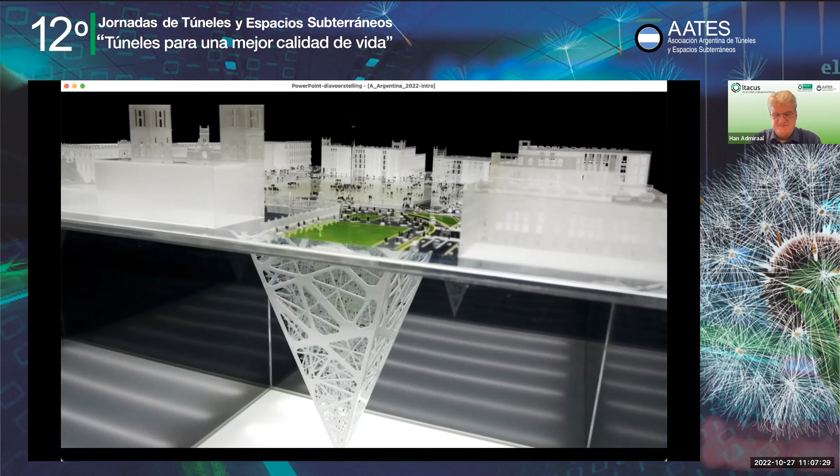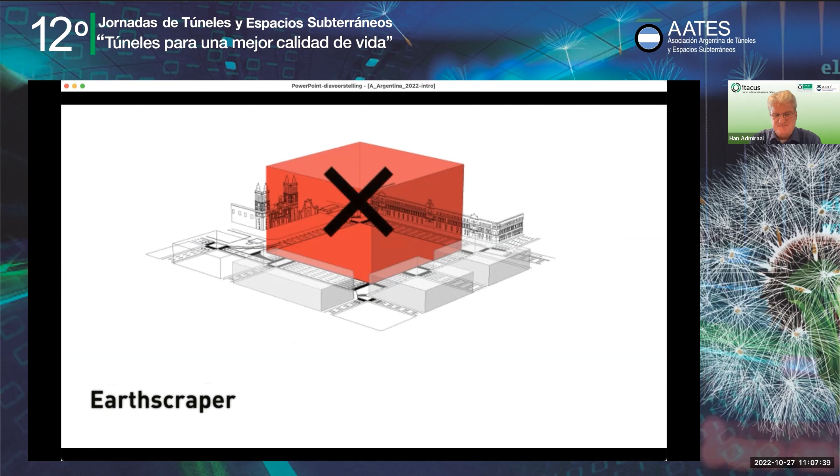Imagine a city with a historic centre, a city with planning legislation prohibiting the demolition of heritage buildings, a city with height regulations limiting new buildings to 8 floors. Imagine that historic city centre needing new social and transport infrastructure, living and office space, leisure facilities. Where would you find the space to fit all this in? You'd find it here, in the Earthscraper, a 65-floor deep, inverted skyscraper. This is all the space you need with no compromise on the existing urban fabric. The Earthscraper is an inverted pyramid with a central void, allowing all underground habitable space to enjoy natural light and ventilation.

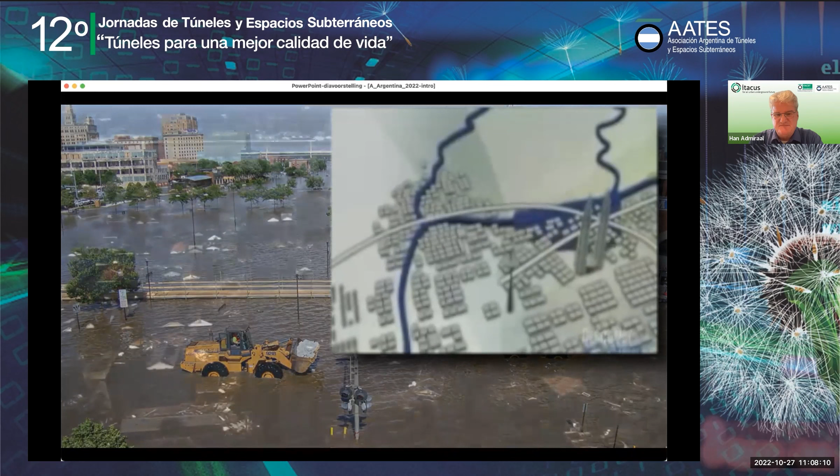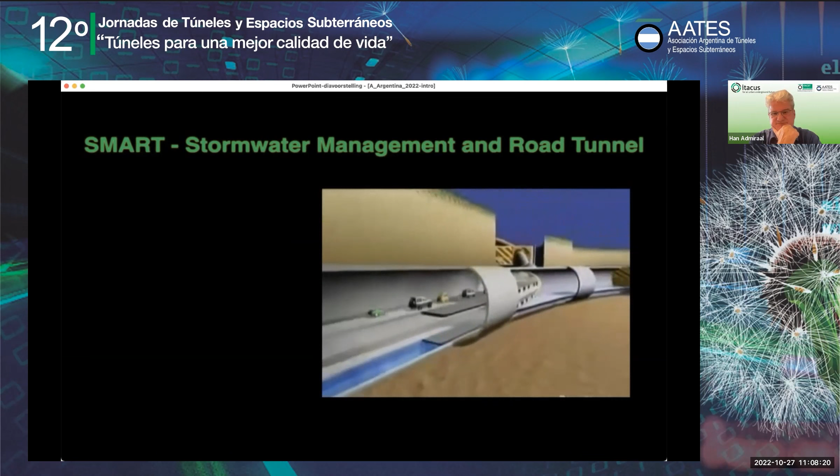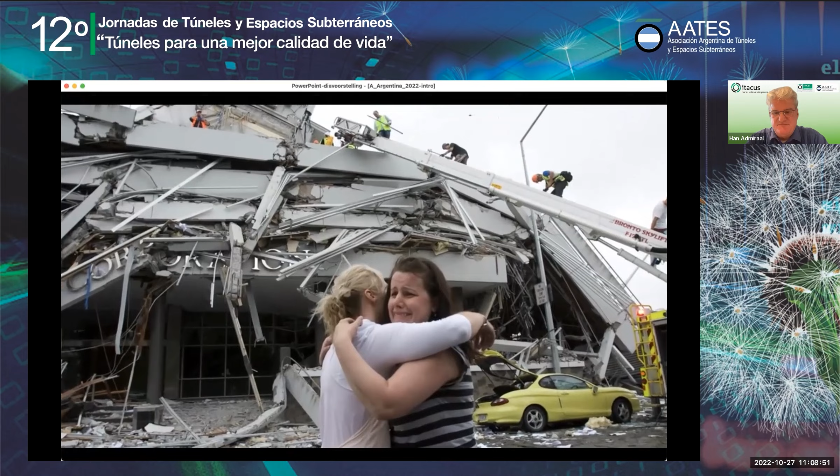In the last 30 years, the world has had to cope with nearly 3,500 floods. Intense rainfall is now a major hazard for cities. So imagine a city with a thriving central business district, but one that is flooded on average once a year, severely disrupting commercial life. How can you prevent this? In Kuala Lumpur, you do it the smart way, with an underground solution combining both a road and a stormwater management tunnel. Next, imagine a city under threat from major earthquakes. A city that has previously experienced the collapse of its vital infrastructure, severely hindering disaster relief efforts. Now imagine that same city making use of resilient underground infrastructure, much less susceptible to earthquakes. A city where even after a major quake, essential aid can be distributed and life protected.

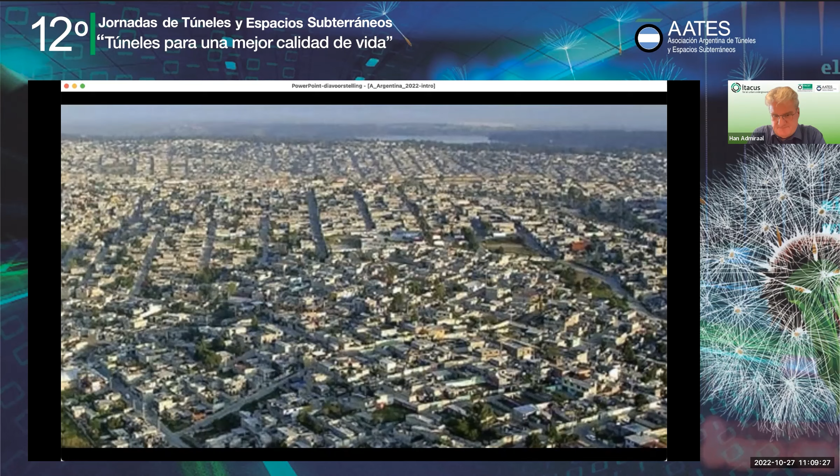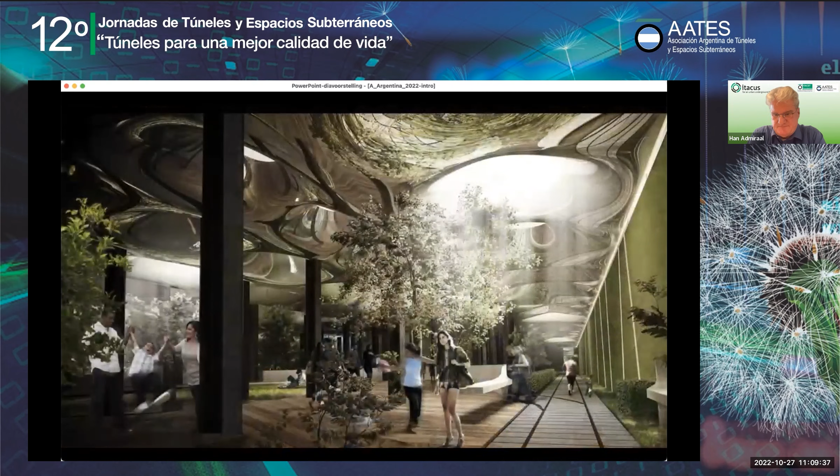As the world's population increases, our cities are becoming increasingly overcrowded, the available space almost all taken. But cities must be livable to be loved. They need open and green areas, public spaces for a society to enjoy. Imagine creating those spaces below the surface, parkland beneath the urban centre. Meet the Lowline, a private initiative in the Lower East Side of New York City, reusing an unwanted, forgotten underground tramway depot and giving it new life.

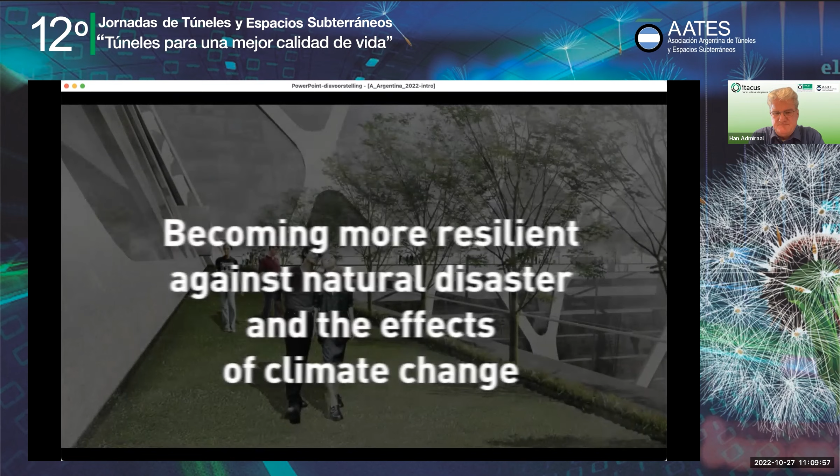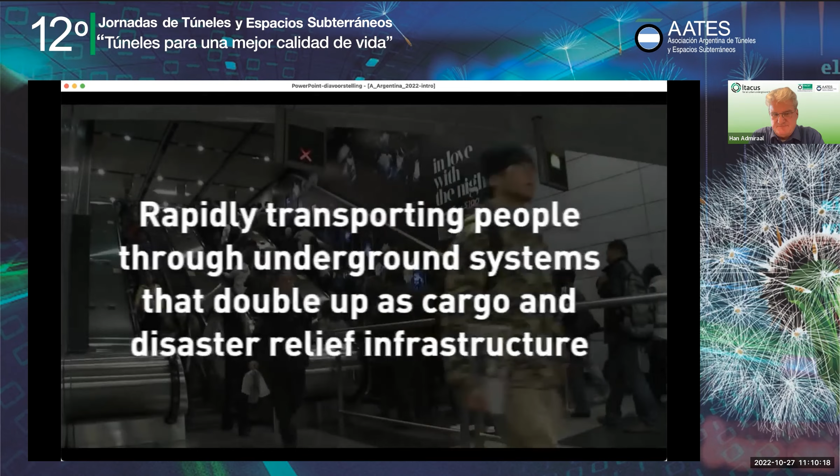Now imagine your city using its underground space, becoming more resilient against natural disaster and the effects of climate change, developing sustainably through the use of geothermal energy, integrating surface and below surface development, creating new connections and increasing livability, rapidly transporting people through underground systems that double up as cargo and disaster relief infrastructure. We know about underground space. Now you know too.

And I think the video sums it up quite nicely. Why cities should know about underground space, and it is all about imagination. We've used some examples like the earth scraper, and it's always been a big hit with the general public. If we show it to engineers, they always question whether you can actually construct something like that.

But when it comes to underground space, we really need to look at it from a different perspective, which is what Antonia and I have been doing when we wrote our book, Underground Spaces Unveiled, but also what our committee, ITACUS, is all about. Antonia. Yeah, precisely. So Han and I have been co-leading the ITACUS committee for a long time, but Han actually initially founded it even before I joined the committee.

The committee is really about a multidisciplinary approach to addressing the challenges our cities are facing. And we firmly believe that the subsurface or the underground space has a very important role to play, and we need to therefore strategically plan our cities, including the subsurface. And that's what our committee is about. Here you see our various activity groups. We have a very multicultural, multidisciplinary team working with us.

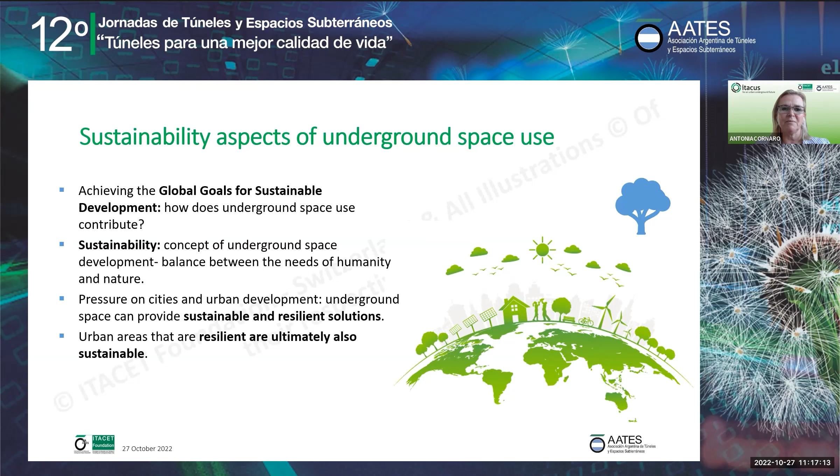So the global goals for sustainable development, there are 17 in total, and I'm sure you're familiar with them because everybody's now paying attention to this increasingly, even on a company level and on an individual level. How does underground space use contribute to these goals? And we are looking here at which projects are already contributing and how, and what are future possibilities of cases that are now still at the initial proposal level or that are currently being prototyped.

Because as you know, there's so much going on in the field of environmental protection, but also renewable energy in that field. And there's so many interesting technologies and solutions being developed. And some need to still see the light of day in terms of actually making it beyond the prototype, but also by becoming mainstream policy in cities and countries.

So here you see an overview of the 17 goals, and each one of them is important, and one cannot say one is more important than the other. But as far as we're concerned, number 11 is a big one that we're focusing on, sustainable cities and communities. But also, as you will see in my next example, for instance, 7, affordable and clean energy, also 8 and 9. But you will see, I will include even other examples, like for number 1, number 2, zero hunger, and number 6, clean water and sanitation.

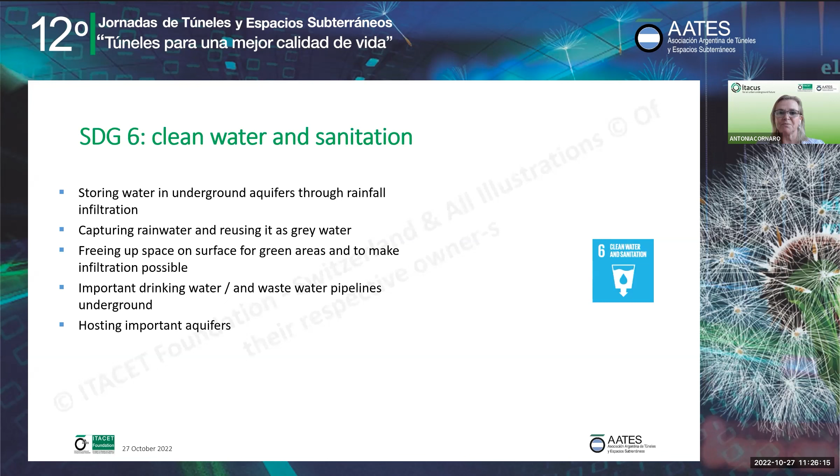So let me give you one example from Mexico. It's a 60-kilometer long water transfer system, the Emisor Oriente, and it's one of the largest systems of that kind in the world. You see here the dimensions and the length and the capacities and the shafts needed to construct it and so on in the graphic. And what it does is bring the wastewater of Mexico City to the water treatment plant 60 kilometers outside.

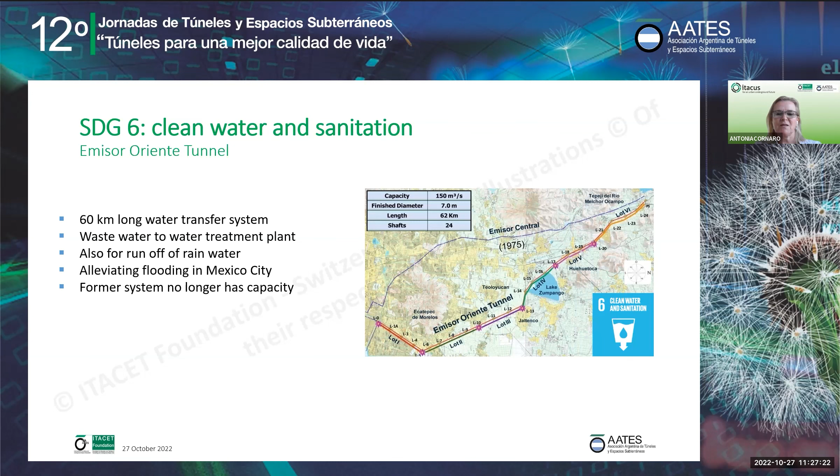But at the same time, it has been designed also for runoff of rainwater, and that really helps Mexico City to alleviate the flooding. And this whole system was built because the former system no longer had the capacity. And that's actually the case in so many cities now that build deep sewage systems and increase their water transfer and water runoff systems, because the cities cannot cope anymore.

I, for instance, live in Switzerland. We're lucky, 2/3 of the energy is derived from hydropower plants. And maybe in the Netherlands where Han is living, they're doing a lot with wind energy. But increasingly, we really need to look at clean sources of energy. So the underground space, again, has a vital role in this. One of the aspects is, for instance, geothermal energy, where we actually go into the deep underground space and derive hot water directly out of the earth.

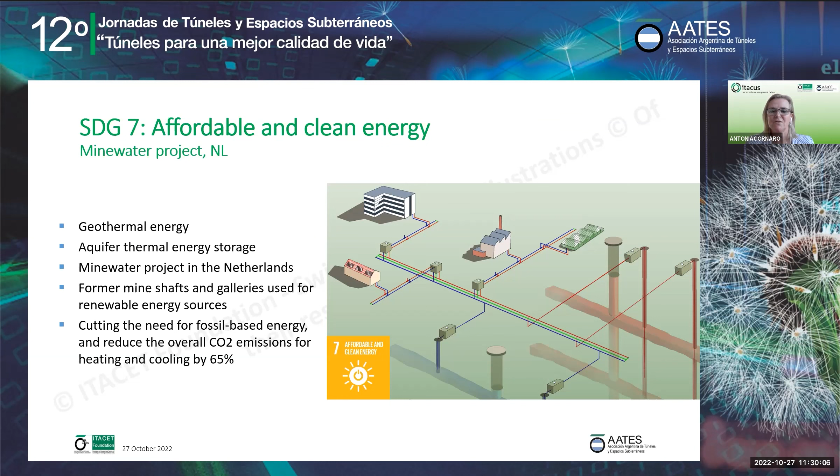And these kinds of systems cut the need for fossil-based energy, obviously. And this particular one, for instance, reduces the overall CO2 emissions for heating and cooling by 65%. So that's really an impressive number that we need to work towards.

We have also the SDG, which is decent work and economic growth. How does underground space contribute? Well, here's an example, the Rectory Farm in the UK, which is in the outskirts of London, actually near Heathrow Airport, where gravel is being extracted. So it's an important source of gravel.

But at the same time, rather than doing an open pit gravel extraction mine, the local community, the investor and the involved stakeholders came up with a concept where they're actually using the underground space also as a major warehousing and logistics facility, and storage and so on, apart from extracting the gravel, which actually creates 2,500 jobs in this rather deprived neighborhood of London. And believe it or not, creating several acres of parkland on top.

So this is, of course, a win-win. You extract something, you're contributing to decent work and economic growth. You're creating labor places, but you're also creating park space on top for this deprived community that was actually urban wasteland before.

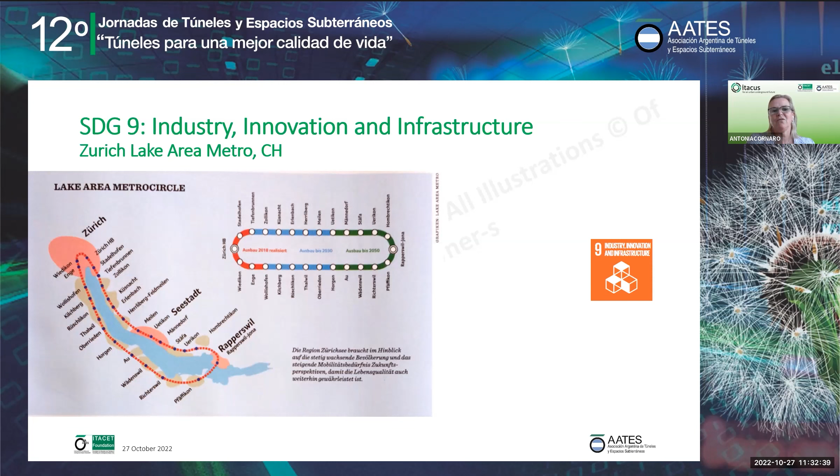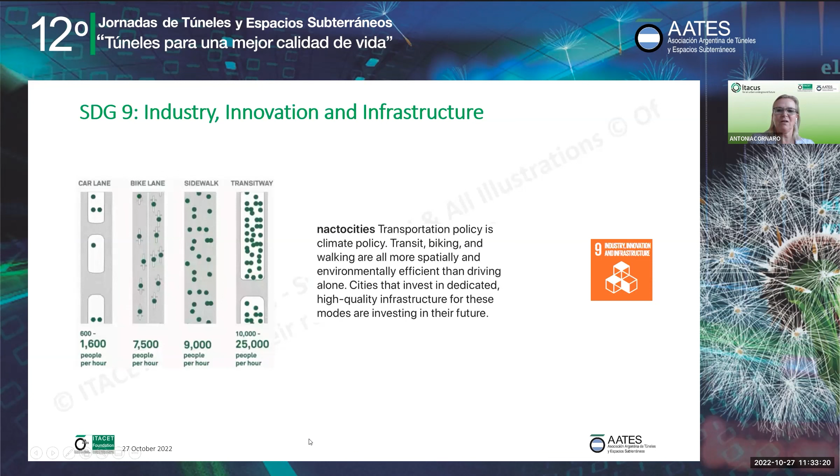And here, this is quite an interesting one, where you see how underground space can also contribute to transportation policy. You see here how many people get moved by which mode: in a car lane, in a bike lane, in a sidewalk, in a transit way. And look, it's 10,000 to 25,000 people per hour that can be moved in a usually underground metro system. So in that sense, SDG 9 can definitely be contributed to by underground systems.

And SDG 11, which I've mentioned also in the intro, sustainable cities and communities, where we want to achieve harmony between humanity and nature. This is really based on the World Commission on Environment and Development, and the Brundtland report, which was actually written in 1987. And we're asking here, what is the role of the subsurface?

It's our foundation of life and includes resources that are actually non-renewable. So once we take these resources out of the subsurface, we cannot replenish them. And that's why it's so important that we balance the exploitation of the subsurface with the conservation of it. And therefore, we need a framework for sustainable underground space development.

A quick overview of the 5 principles of ecological infrastructure, according to Hillary Brown from the US. She says you need to really fulfill 5 factors towards achieving sustainable cities and communities: you need multi-purpose and mixed land use. You need to reduce energy and greenhouse gas emissions. You need to include green infrastructure. You need to deliver social and economic benefits to surrounding communities. And you need to contain climate adaptation measures.

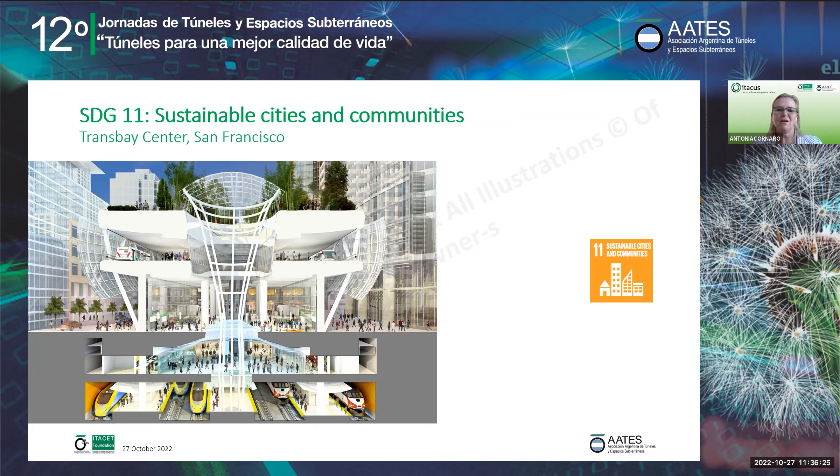And then you have leisure areas, but also office spaces, and especially it connects to the surrounding offices. And most importantly, it includes a park on top. So it actually absorbs CO2. This shaft brings in natural light, but also natural air. The whole building is extremely energy efficient. And so these are the concepts that we really need to look at for our sustainable cities and communities.

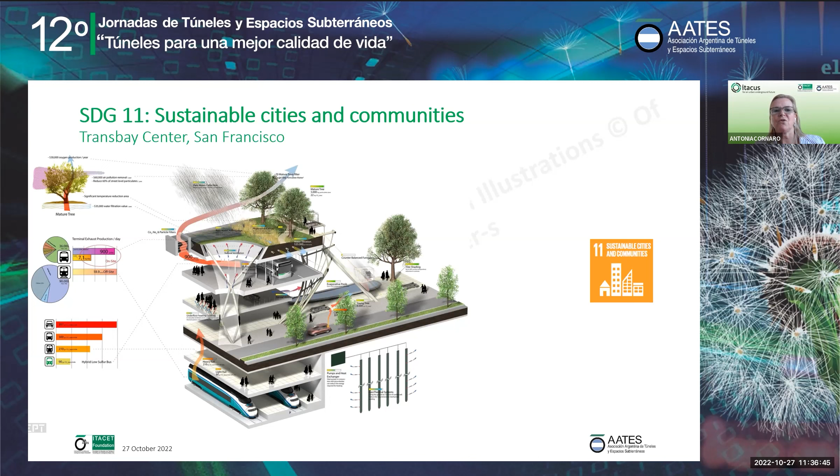Here you see another graphic of the building. And we also have it described in our book, because we find these are the concepts that cities need to deploy. By the way, it's also capturing rainwater and using it for gray water in the whole building, which I've mentioned before.

And maybe another example, we've talked about infiltration and water treatment. So this could also go under SDG 6, but at the same time it provides something towards sustainable cities and communities. This is actually a golf course on top in the Bronx, New York City, but it's actually a water filtration plant, and water is being treated and cleaned underneath this golf course. So these are really interesting examples where you couple uses and you provide a benefit from a natural, environmental and social point of view.

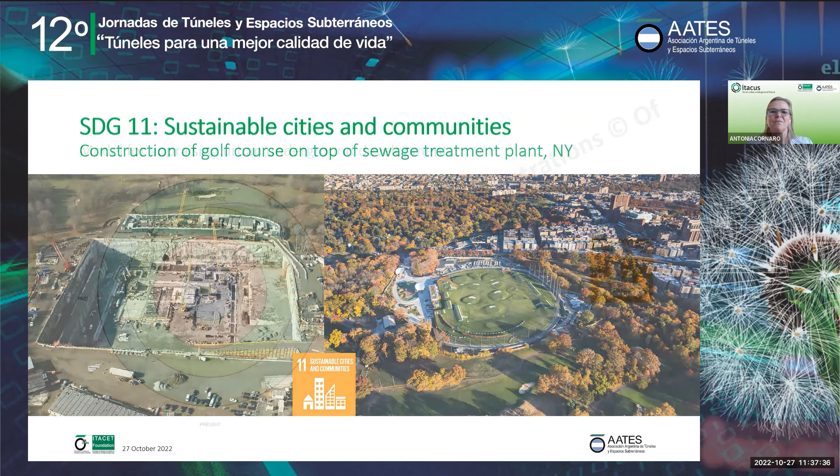And maybe a quick word about the model that Han and I have come up with to appraise urban underground development, where how do you actually appraise a project like that in terms of, do I benefit and do I contribute toward SDG 11? So we look at the underground space development itself, which you see in the center, then how it interacts with other underground structures. Then we look at the impact on the ecosystem services and on the suitability of the subsurface overall. And that needs to be looked at in past, present, and future.

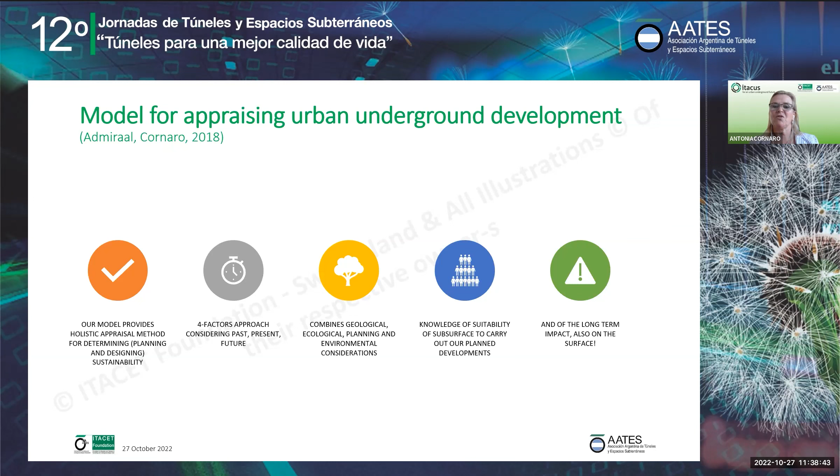And it's really a 4-factor approach combining all these important aspects of geological, ecological, planning, and environmental considerations. And for that, the knowledge of the suitability of the subsurface is extremely important, but also of the long-term impact on the surface.

Another example that is interesting is the wafer fab chip factory in Switzerland, where a developer wanted to produce chips in a completely vibration-free environment and wanted to build a factory above ground in a small community in the Rhine Valley in Switzerland. And the community was opposed because it would have needed extremely large foundations, and it would have been an extremely boxy building, kind of scarring the landscape. So Amberg Engineering, who was the designer for this project, said, please go underground and look at the underground solution.

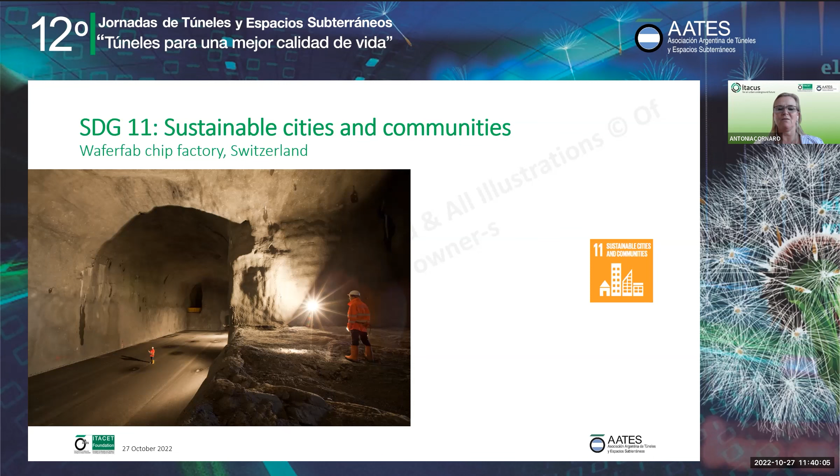And this developer actually managed to not only cut costs by going underground, but also provide something that is a contribution towards this community in a sustainable way, because it was not affecting any surrounding infrastructures. It has no impact on the surface. It creates labor, like the examples I showed you in the UK. And it can also be converted to something else in the future, which is important in designing underground spaces.

So another very important one, SDG 13, climate action, something we're all super concerned with now. One of the biggest issues facing humanity, and our cities are especially concerned and affected. Most of our mega cities are coastal cities, and they're prone to floods, susceptible to erratic weather patterns, to heat, to drought, flooding, and storms. We hear it in the news all the time.

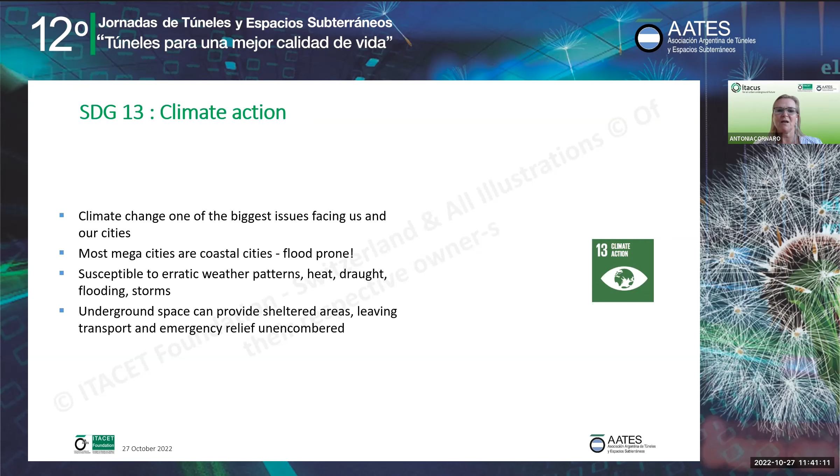And underground space can provide sheltered areas and leave transport and emergency relief unencumbered, which we've seen in the Imagine video in the beginning. So if we design the underground spaces and underground infrastructures with a view to that, we can really have sheltered areas and emergency relief when needed.

And resilience is a big part of climate action. And resilience is really the capacity of individuals and communities and systems to survive, adapt, and grow in the face of stress and shocks, and to transform when required. And building resilience is about making people and communities and systems better prepared to withstand catastrophic events, whether they're natural or human-made, and to make them able to bounce back, to come back more quickly and emerge stronger from the shocks and stresses.

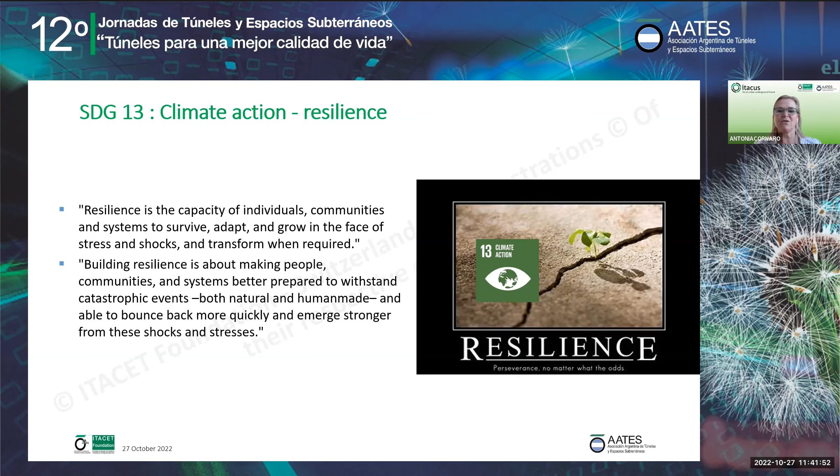So the SDG 13 says we need to help mitigate shocks and stresses. And for instance, earthquakes and floods and the heat island effect, the underground space can help because it has the capacity, for instance, for storage of rainwater. It keeps us more sheltered in earthquakes. And we have some very interesting examples, for instance, from Rotterdam or from Kuala Lumpur, where we serve transport, but we also alleviate flooding.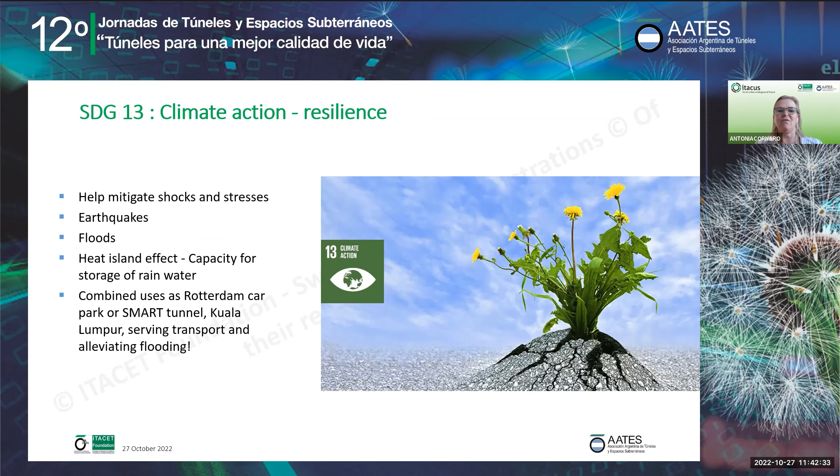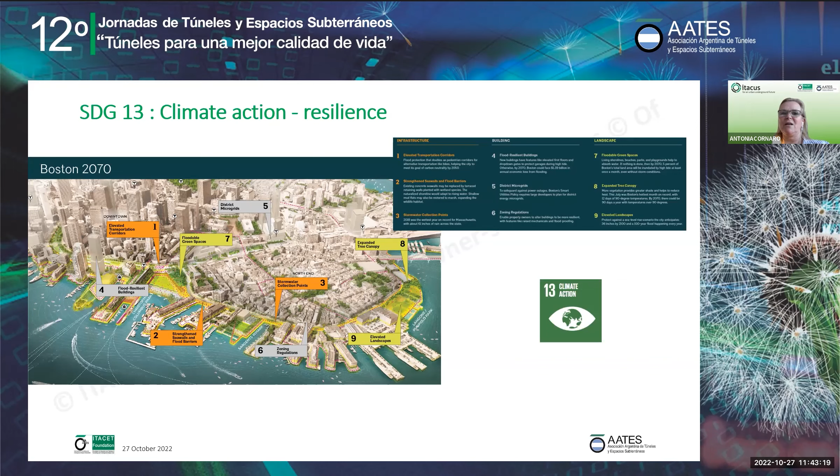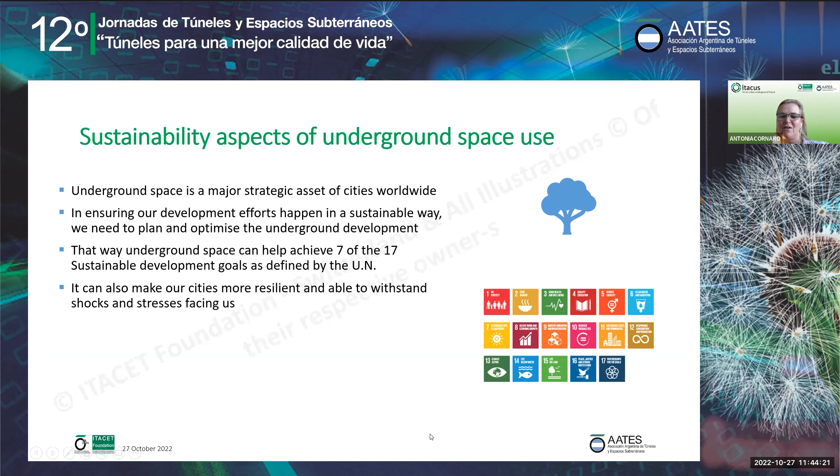And I want to thank you and maybe see if there are some urgent questions, and if not, we can also take questions later. And I would otherwise hand over to Han, who will give the next part. Yes, Antonia, there are no questions at the moment. Okay, perfect. So you can continue, please. Okay, excellent. So I've stopped sharing, Han. Yep, I'm going over to my presentation.

So thank you, Antonia, for talking us through this very important topic of how underground space use can contribute to the Sustainable Development Goals, but also when we are looking at developing the subsurface, how we must try to balance the needs of humanity versus the needs of the subsurface itself. So we need to also carefully look if we're not destroying things that are below our feet and that are supporting the life on the surface.

What I want to be talking to you about in these next 30 minutes is giving more or less a historic perspective, and we've called it From Yaodong to the Third Dimension, because that's really the span of the development. The Yaodongs, as we will see in a minute, go back a long time. They were already there long before the common era, and the third dimension is a way of thinking that has come into urban planning in these past 20-30 years.

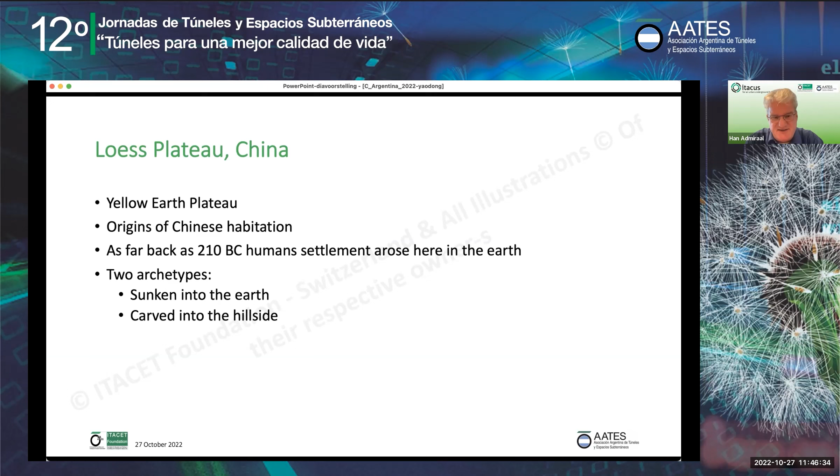So to start with, let's go to the Loess Plateau in China. It's also known as the Yellow Earth Plateau. It's the origins of Chinese habitation. And we can trace human settlements as far back as 210 before the Common Era. And there are two typical archetypes of settlement, those that are sunken into the earth and those that are carved into the hillsides. I will show those to you in a minute, and then also show how we've taken on those ideas in the more contemporary underground spaces that we are creating nowadays. So sunken into the earth and carved into the hillside.

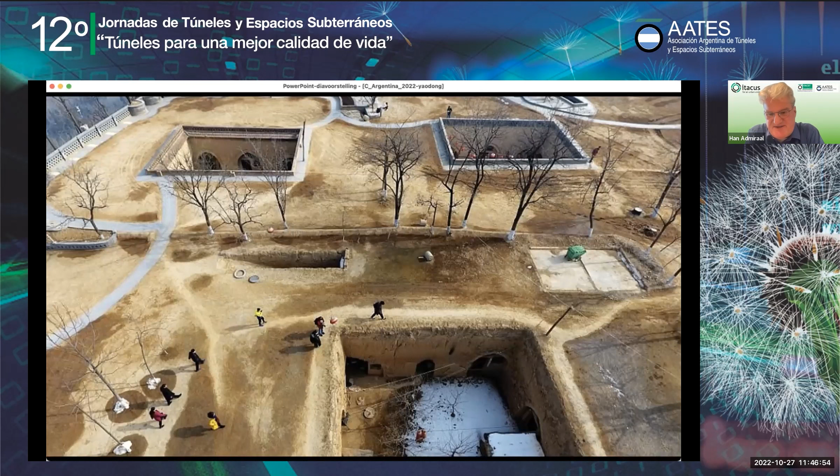So this is the Loess Plateau, which is in itself very bare. There's a lot of wind, and the surface conditions are not very ideal to stay or live on the surface. So that made people start digging into the earth and creating these sunken atriums from which they then carved out all kinds of rooms and corridors.

And the interesting thing is that these Yaodongs have been there for a long time, and it's certainly not something that is only for historic purposes. They are still in existence. They are still being used nowadays. They have been modernized, of course, a little bit, but the principle is still there.

And one of the most interesting ideas that we can take from the Yaodong is the atrium, which creates the entrances into the spaces that have been carved out into the subsurface, and the trees that are planted there. You can clearly see on this picture that there are trees or shrubs down below, and they give a connection to the earth, to the surface, which is very important. And we'll see that coming back in some of the more modern day examples that I will give later on.

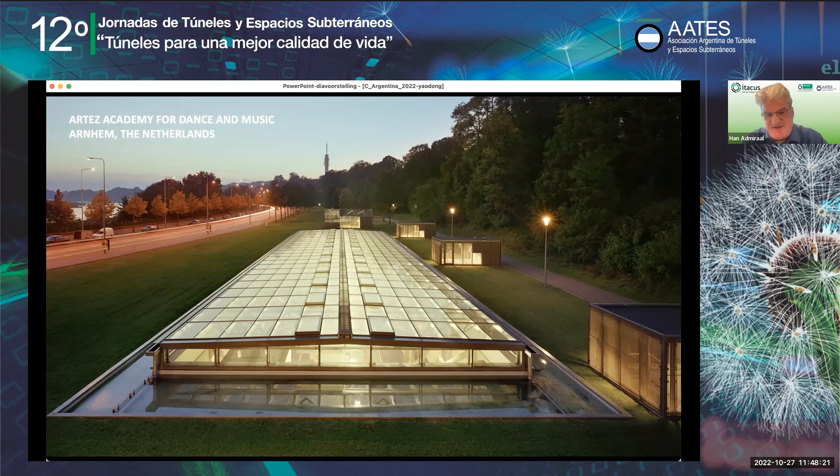So if we look at modern day equivalents of the sunken into the earth idea of underground space, I'll talk about two examples: the ArtEZ Underground School in Arnhem in the Netherlands and the Gangnam International Transit Center in Seoul, South Korea. So this is the underground school in Arnhem, and what we're seeing here is the roof of the facility, which is just coming out onto the surface. It's about 0.5 meter above the surface.

The reason that they went for an underground space solution in this instance was that the original building had been designed by the renowned Dutch architect Rietveld, and there was no modern day architect who wanted to compete with Rietveld in designing a building next to it. So that was one reason that they said, well, can't we do something underground?

The other one is that where you see the trees on the right-hand side of the picture, that is the front edge of what we call the Veluwe Massif. So that is an area of protected natural beauty. So it wasn't really allowed to build any new buildings in front of that. So two compelling reasons to go below the surface.

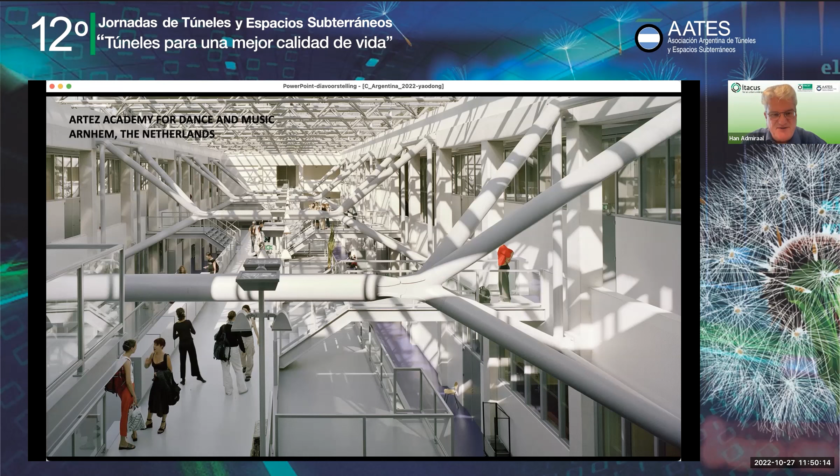And also notice that the windows have been placed in such a way that when people are inside those rooms, they can look out through the windows and through the roof to the outside. So there's this constant contact with the outside, which basically means that when you're inside that building, you don't really feel like you're below the surface. And I think that's a very important design aspect as well.

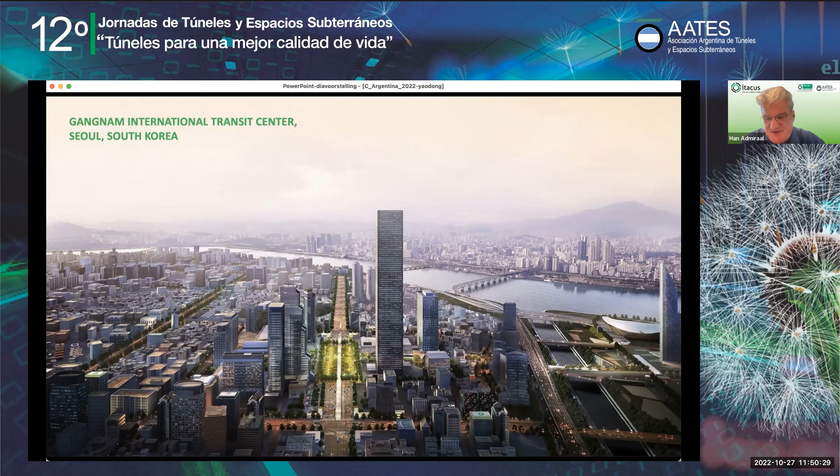Here is the proposal made by Dominique Perrault, a French architect, for the Gangnam International Transit Center. You can see it in the middle of the picture. It's basically a light line, if you like. It's a glass walkway on which you can walk, but at the same time, it serves a purpose of letting in light to the world below.

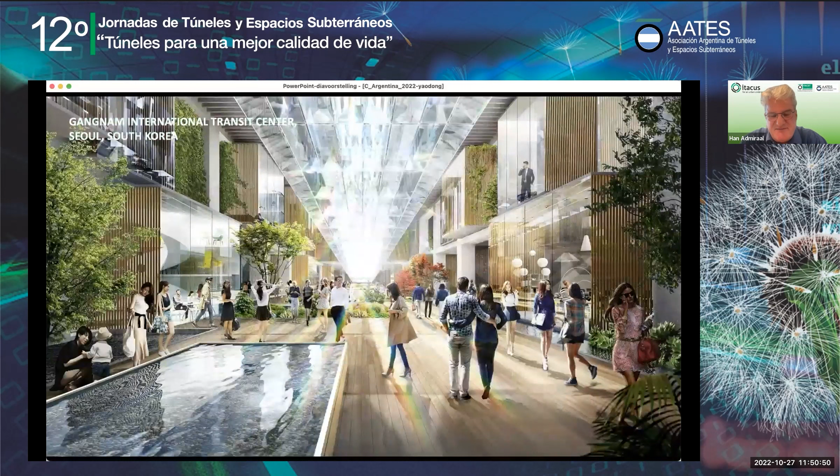And this is how the world below has been envisaged by Perrault. You can see how the light comes in through the canopy again, not unlike the underground school we just discussed. But you can see that there's really a very high quality area being developed below, connecting various transit services, a bit like the example that Antonia showed from San Francisco, but much more elongated. But the main point being that we can see the basic concept of the Yaodong. We can see it back in the way that we're using the underground space here.

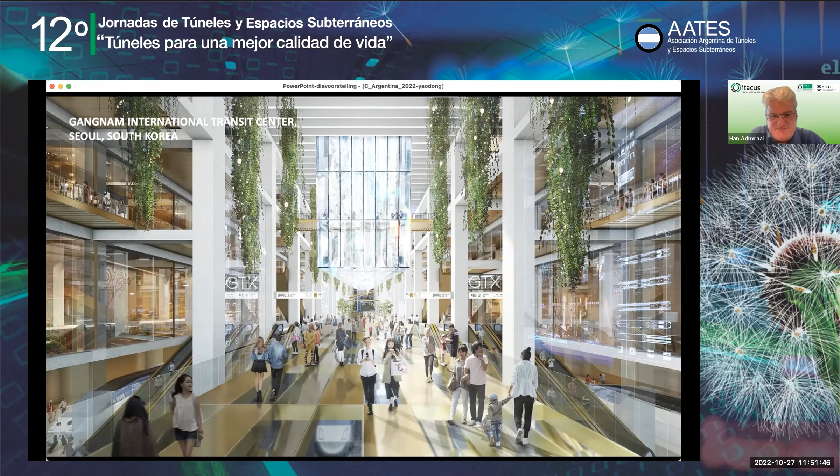And here again, just another image of how it will look when it's completed. So this is still under construction in South Korea. But the Yaodongs not only go into the earth with these sunken atriums, as we saw, we also have Yaodongs which are carved into the hillside. So basically, they are human-made caverns, if you like.

And this is the same development we can see in Hong Kong, Singapore, Norway, Sweden, and Switzerland, where the excavation of material from inside the hill is actually quite interesting, because it provides building materials which have a value which you can actually sell off. And then in getting the material out, you create these underground spaces, which again have a value in terms of real estate. And again, Antonia already demonstrated that principle with the Rectory Farm project.

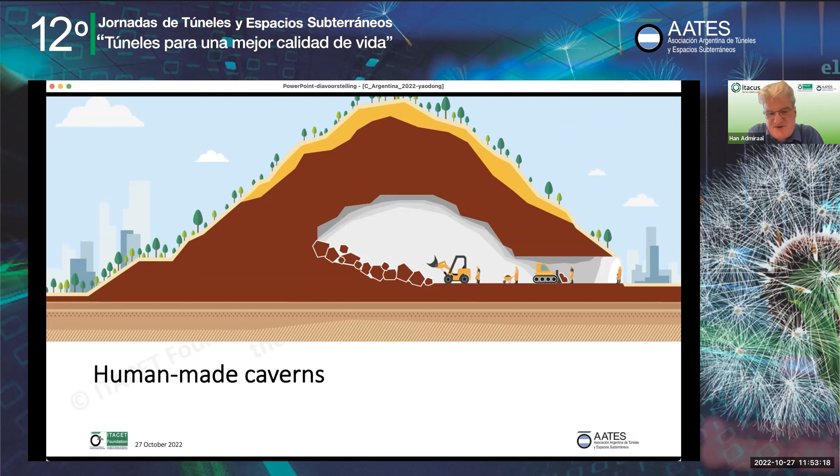But at the same time, and just going back to this image, the point about creating these caverns is that the use of those caverns can actually be independent from the space that has been created. So even if you place a sewage treatment works inside that cavern, if at any time those treatment works are not needed anymore, you can take them out, and the space that is left there can be repurposed for something else. And this is another important principle when it comes to any underground spaces that we create. We need to think about how they can be repurposed for other functions, other uses over time.

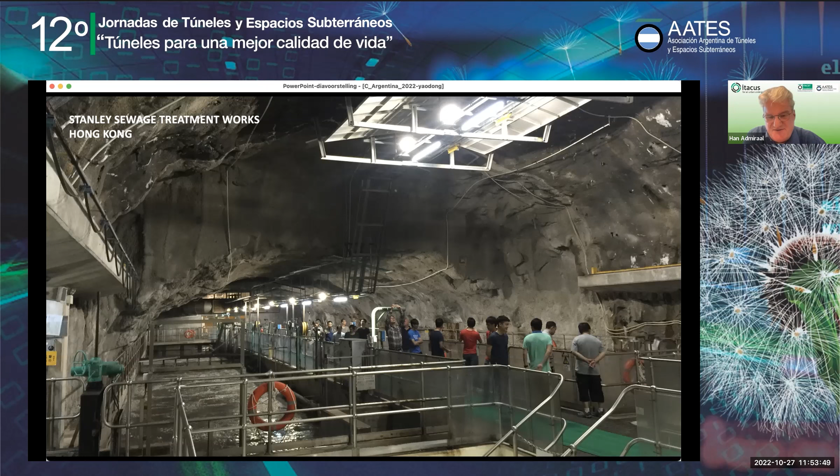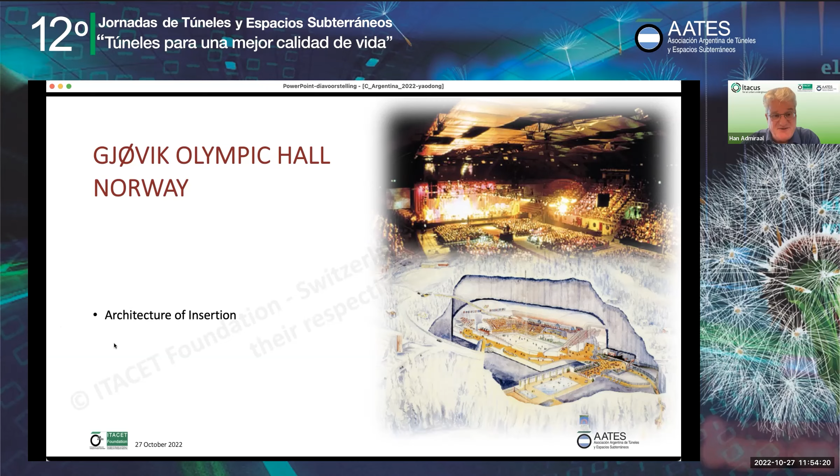And the engineers that started work on the railway said, look, we're going to build this railway because we really believe that by the time we're finished, someone will have built an engine that is able to take these gradients, and indeed that is what happened. And you can see this kind of optimism that they had in those days.

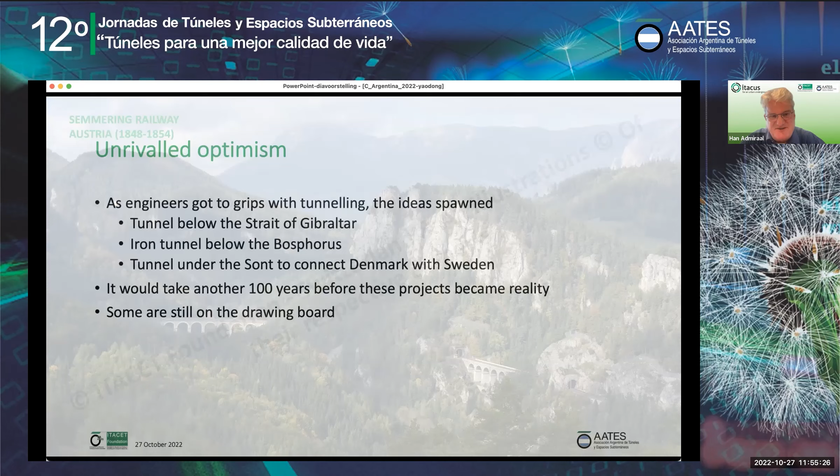There was a kind of unrivaled optimism as they discovered that they were able to build tunnels, and engineers started to come up with ideas for a tunnel below the Strait of Gibraltar. They wanted an iron tunnel below the Bosphorus. They wanted a tunnel under the Sound to connect Denmark with Sweden. And in reality, it would take another 100 years before those projects really became reality, and some are still on the drawing board.

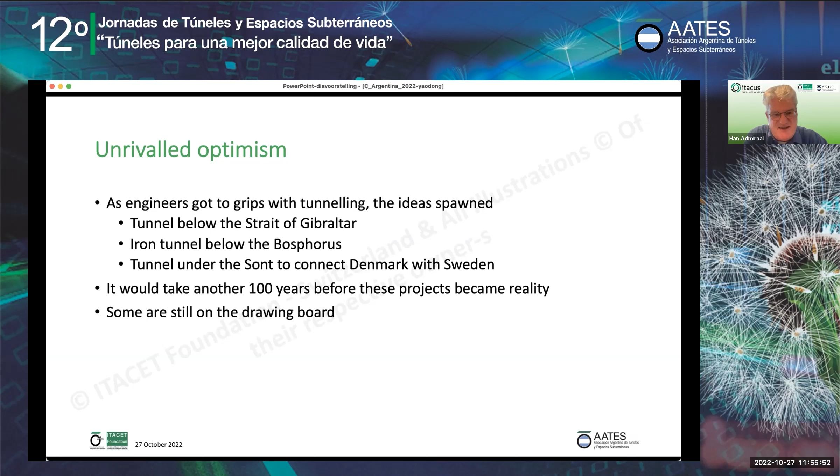So one of the things that we need to do when it comes to all these underground space ideas that we have, we need to be able to convince people that these are good developments, that we really need these kind of developments, and that they are good for humanity and for the future of humanity.

Isambard Kingdom Brunel, who actually more or less invented the shield tunneling method, built a tunnel below the Thames in London. That tunnel was flooded multiple times, and in 1827, after the water was taken out again, he actually held a banquet there for his investors to show them that all was well, that he still wanted to continue the work, and was really convinced that he could complete the tunnel, and he did so.

And interestingly enough, I think it was in the 1990s, when I was project manager for the first TBM-driven tunnel in the Netherlands, when it was completed, we also had the same kind of dinner in the tunnel for everyone, just to show them that it was really safe. We already knew that, but we really thought it was very interesting to kind of repeat Brunel's banquet.

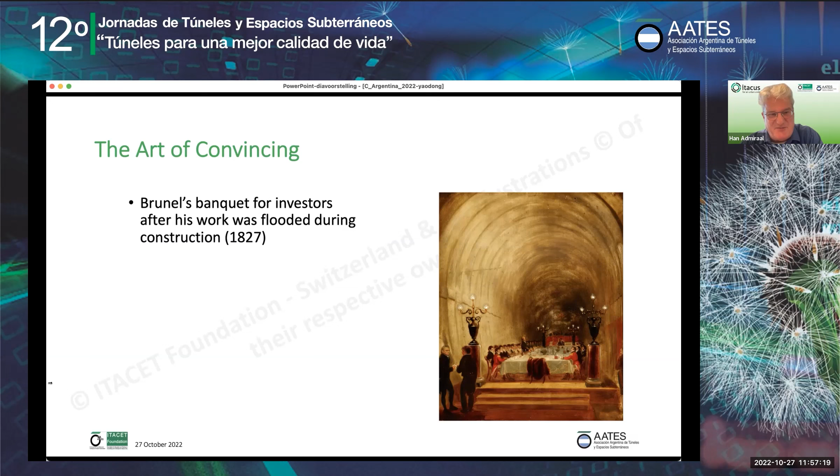But what it really means is that a lot of the ideas that we have, and a lot of things that we are enthusiastic about, kind of have the Jules Verne effect. And the Jules Verne effect is that we have a brilliant story, but our timing is very often lousy. You can see that from the image on the right, which is Jules Verne's image of a rocket that could carry people to the moon, and the image on the left, which is the one that Elon Musk is building.

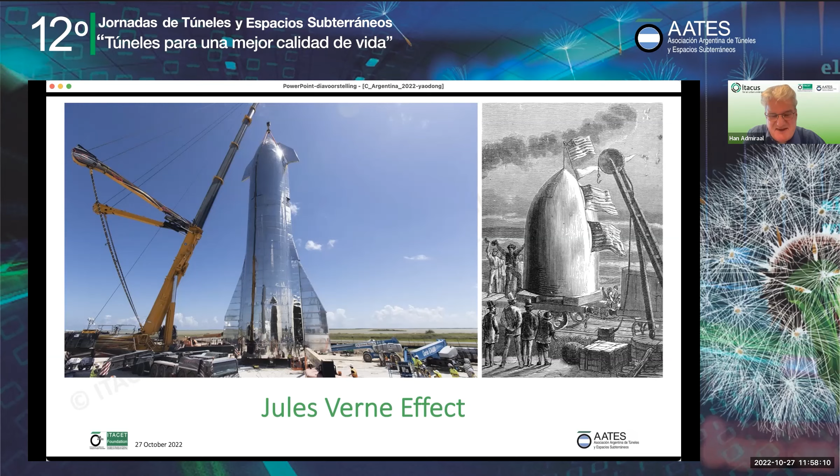And they're actually quite similar, but it's taken a long time since Jules Verne first mentioned going to the moon, and we actually went there, and now again we're thinking about going there again. So one of the things that we need to learn when it comes to underground space development is it's not just that we need to get the story right, we need to get our timing right as well.

And that takes us into the 19th century, when in Paris we saw a lot of underground space development. It was Georges Eugène Haussmann who really developed Paris as we know it today. In his memoirs, he wrote about the underground galleries that he had been designing and building. He saw these underground galleries would be like the organs of the metropolis and function like those of a human body without ever seeing the light of day.

Pure and fresh water, along with light and heat, would circulate like the diverse fluids whose movement and replenishment sustain life itself. And what we see here is really that people started to think about using the subsurface, but using it in many ways like the engine room of the city.

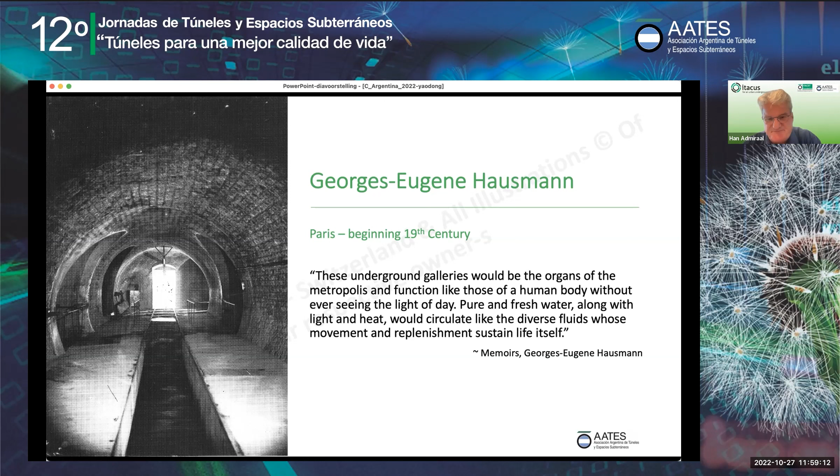Eugène Hénard, who came later in 1910, made an observation where he said, look, our thinking is totally flawed. We see the bottom of the road as the absolute level between surface and subsurface, but if we place it on a level with the ground in its original condition, then there's not much we can do. But if we actually raise that level, and you can see that here in some of the drawings that he submitted at the time to the Royal Society, he's actually raised the street and created an elevated street.

And in doing so, he created all this space below the street for services, basically little cars with coal and other kinds of services that he thought the houses of those days required, and it also tied in with houses. And you can see here on the right of the picture even storage for cars below the surface.

And indeed, if we now look at places like London, where the rich people are actually extending their houses downwards, the so-called iceberg mansions, you can see the ideas that Hénard had still being used. He came up with a clever idea. He just said, let's raise the street level and then build below that.

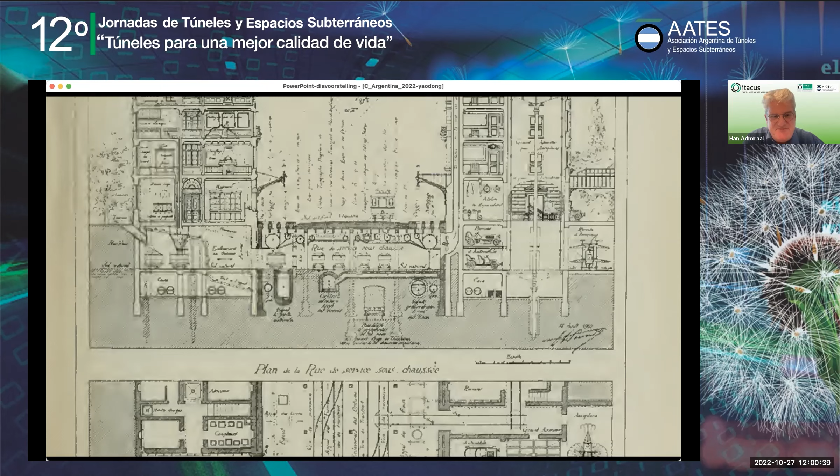In 1914, it was George Webster in the United States. He worked for the city of Philadelphia. He said little thought has been given to the planning and laying out of underground streets. And he talked about the subterranean street, where he saw a massive use of the subterranean street for all kinds of services.

I like the way that he also proposed the connections for refrigerating pipes, for example, and steam and hot water pipes, which is not very far off the district heating systems that we now have today. But he said, look, if we're going to have all these uses, then if we don't plan that, if we don't ensure that the spaces are there to be used, and we do this in a logical way, it's going to become a chaos.

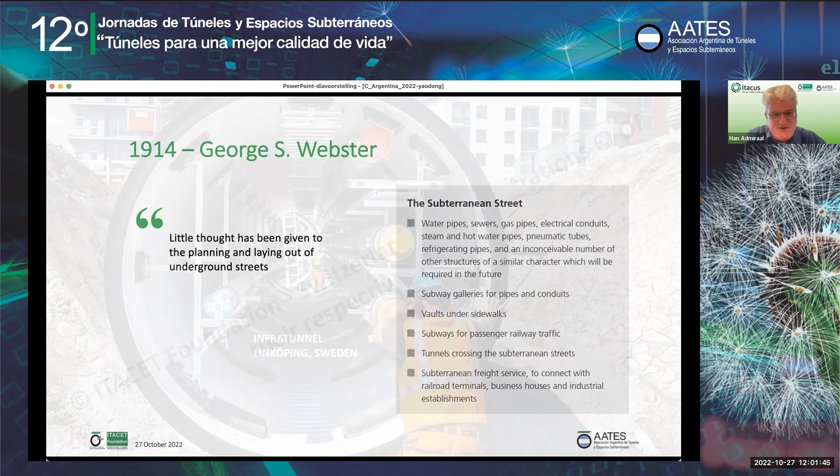So this was in 1914. It's over 100 years ago, and we're still struggling with the whole concept of planning the subsurface. This is a modern day example from Sweden, the city of Linköping, where they are building a new extension of the city, and they've put a so-called infratunnel into place.

And this infratunnel basically carries all the elements that Webster summed up, and they're placed into one big tunnel, which was prefabricated, put into place, and it's basically 3.5 kilometers of tunnel into which all the cables and pipes can be placed that are needed for the urban area and that serve the urban area.

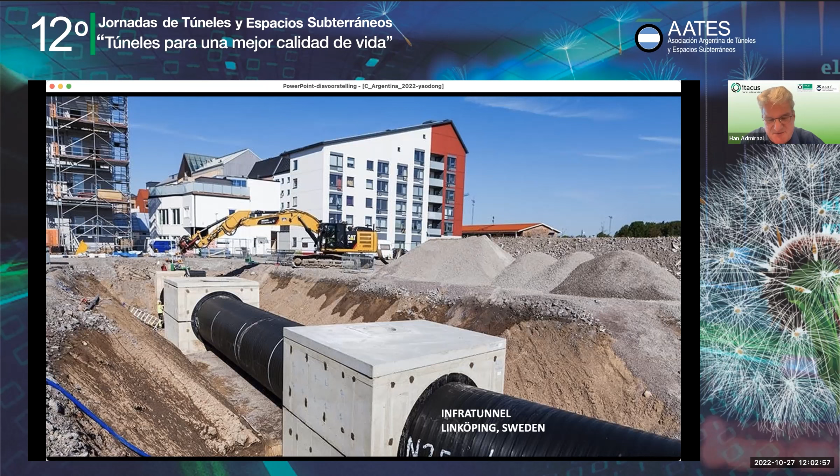And rather than haphazardly placing them all at random below the surface, they've been put into this infrastructure collector, which actually makes access to them a lot easier, maintenance a lot easier, and you don't have to disturb the soil every time to make space for a new pipeline or cables. And here you can see how the concept works. Interestingly enough, the actual tunnel part is actually a big plastic pipe, which also says something about the development of material science.

Moving on to the 20th century, we then saw that we started to really think about the development of the subsurface, and there was a first International Congress of Underground Urban Development in Paris in 1937, and it was Edouard Utudjian who was really the promoter of this Congress, and the promoter of starting to think in a more rational manner about the underground.

And one of the things that he said was that the chaotic side of our congested cities, along with the ever-increasing use of the underground for urban functions, have inspired us to look to the subsurface for remedies and improvements to the multiplicity of ills from which our great urban centers are suffering. In addition, we would like to introduce order and discipline to this immense field in which a great number of the life support arteries of the city are haphazardly buried and tangled.

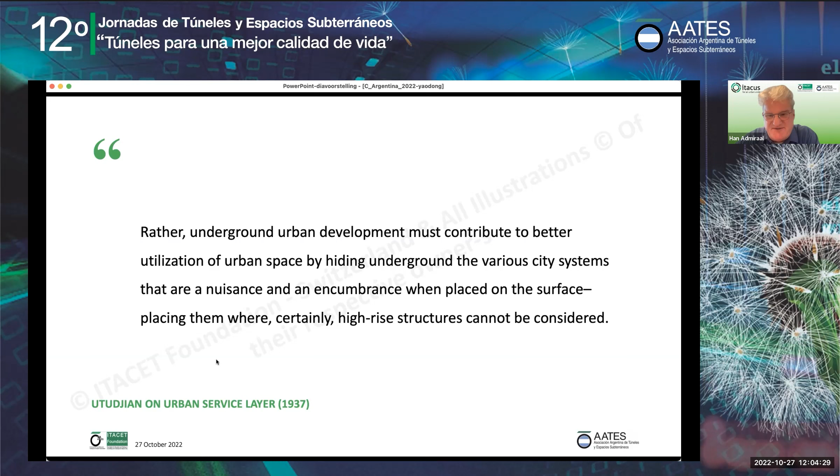So he kind of came back to what Webster already said in 1914, and he added on to this. But still, we are still thinking about using the subsurface as this kind of engine room for the city and placing all the things that we don't want to see above ground below ground. Rather, underground urban development must contribute to better utilization of urban space by hiding underground the various city systems that are a nuisance and an encumbrance when placed on the surface, placing them where certainly high-rise structures cannot be considered.

And then on cross-discipline collaboration, he said, above all, the underground urban developer's role will consist of overseeing an harmonious interdependence and coordinating the entire body of data in order that researchers and artists, scientists and technologists can freely endow this field with their richest and boldest creations.

So he really had a vision about using the subsurface, and he laid out the vision in his little book, L'Urbanisme Souterrain, in which he came up with various ideas on how to utilize the spaces below cities or using it in mountains, and not unlike again the basic concept of the Yaodongs that we saw at the beginning of the presentation. In 1952, he really wrote something very important, and we called it Utudjian's planning appeal.

And he said it is necessary that the urban planner thinks deep and that underground development of cities is done not through random necessities, but according to a definite commitment, legislation, and a predetermined plan. And here you can actually see the development in his thinking, that he's coming to the point where he says, look, the urban planners need to start thinking deep, and we need to look at the development of cities in a logical and a rational way, and not through random necessities.

So in summary, using the subsurface has a tradition which goes back long before the Common Era. We saw that from the Yaodongs, and indeed we can go even further back. We all know that humans have been using caves for a long time. We know there are other examples in Turkey, for example, Cappadocia, where even recently in Turkey a new underground city was discovered. So we have a long history of utilizing the subsurface as humans.

And although the habitation was the first use, after the Industrial Revolution, the focus was on utilities, and this whole idea of creating the engine room of the city below the surface, or the urban service layer, as we call it, that was created. And the development since has always been haphazard and autonomous.

And one of the ways you can actually think about this is that if you look at the amount of underground lines that run below London, and they're all utilizing this layer known as the London clay, well, that layer is actually completely full now. They really don't know, if they ever want to make another metro line under London, where they're going to place it, because the London clay obviously has a lot of advantages for building these underground systems.

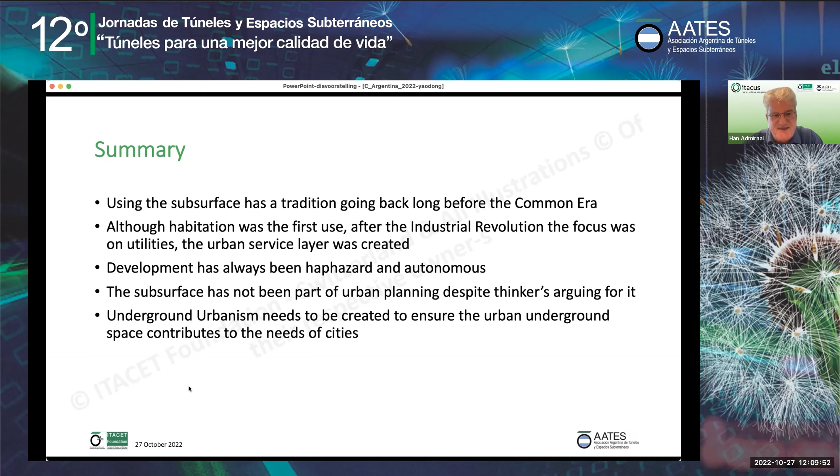As the prefect of the Paris region in 1970, Maurice Doublet, said, by imagining cities in 3 dimensions, you have multiplied tenfold the perspectives offered to those having the responsibility for planning of the cities. And I think that quote really encapsulates what it is all about, that we are moving from the era of the Yaodongs. We all know that we can use the subsurface. We have ideas on how to do that, but really we need to start looking at the 3rd dimension. And this is what is really happening.

And as you will hear later on in our presentations in the second part, we will not talk just about 3 dimensions, but about 5 dimensions that we need to address when it comes to developing underground spaces. And that's my presentation for the moment.